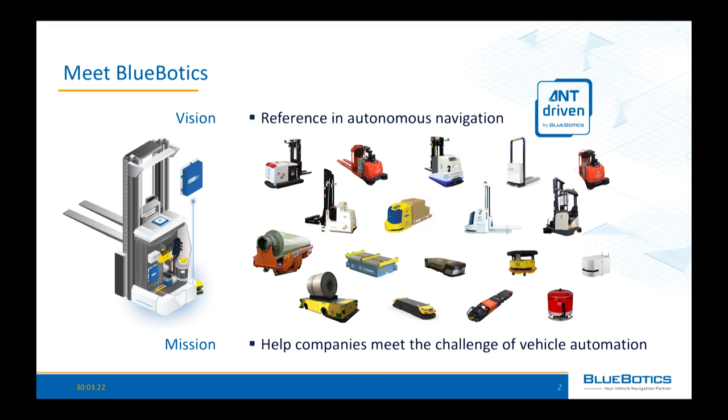Today I'll be talking about three projects that our customers have realized. Our company, BlueBotics, supplies a navigation system and fleet management to vehicle suppliers. Our vision is to be the reference in autonomous navigation, while our mission is to help companies go through the challenge of vehicle automation. Our company is 21 years old, and our customers have installed more than 3,000 vehicles around the world. We assess the systems to be more than 1,000, because we don't even know right now, our customers doing all the work. And we've calculated that the vehicles using our technology did more than 10 million kilometers.

Now let's dig into the topic of today. We have three examples of applications that have been implemented using our technology. Again, we are just the technology supplier. The work has been done by our customers, the vehicle suppliers, and the integrators.

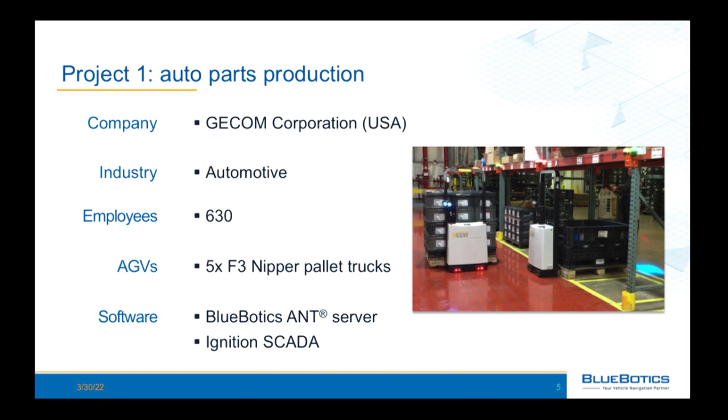We start with an application in auto parts production in the USA. The company is called GECOM Corporation. They are in the automotive industry, with 630 employees, and they've installed 5 AGVs from the company F3 Design in the Netherlands. The model is called Nipper. They've used our fleet management to integrate with their own warehouse management system, the Ignition SCADA system.

The challenge for them was to optimize the use of resources, especially headcount. They were analyzing their own plant and realizing there were some inefficiencies, and that's how they approached the project, in order to optimize efficiency and costs.

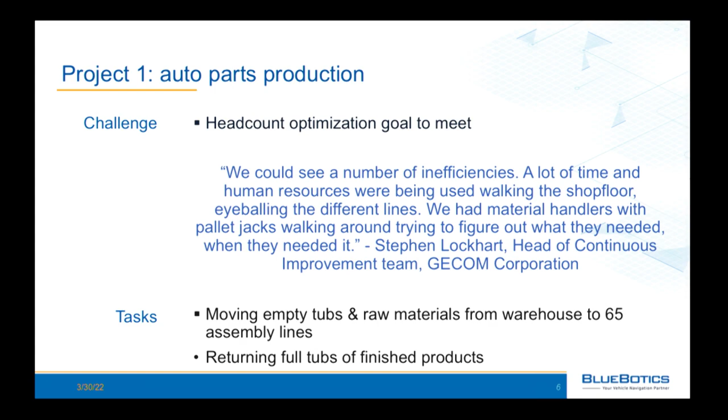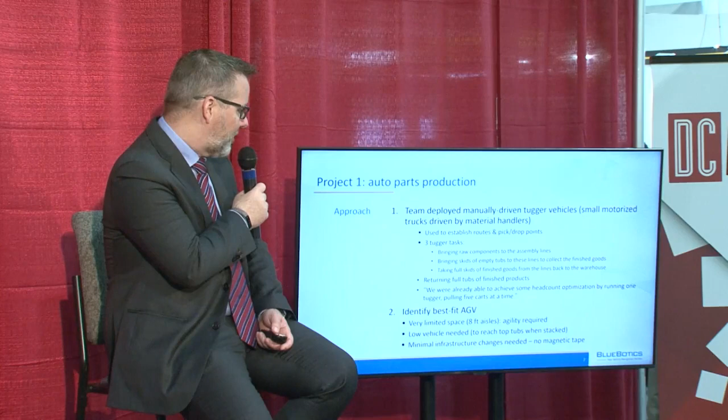Basically, they have to move parts around the warehouse, tubs and raw materials that go from the warehouse to the assembly. They were working before with manually driven vehicles, which was quite complicated because of a lot of movements, and they had quite slow delivery because of that. So they had to go through an analysis of the processes in order to find the best solution for them. And they had one big constraint, which is that the space they have is very limited. So that's why they had to find the right solution for automation in this plant.

The right solution turned out to be the F3 Design Nipper vehicle, which has a capacity of 1,000 kilograms, or about 2,200 in US metrics. It's a very compact vehicle, and as the person responsible for the project said, as soon as they saw this vehicle, they thought that's the one they need for their application.

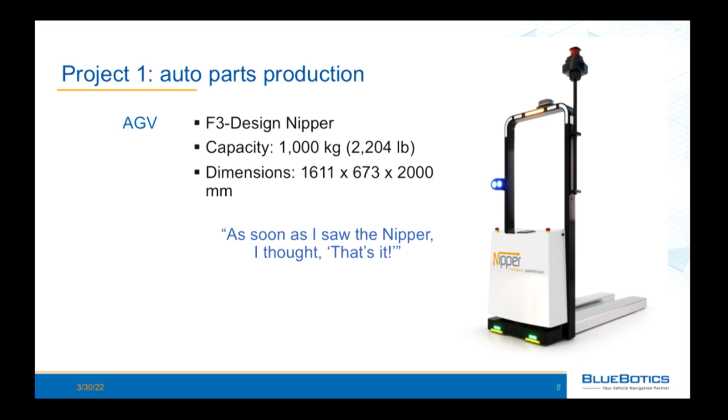In terms of software integration, they used the fleet management provided by us as a technology supplier in order to interface with their SCADA software, and they developed a dedicated interface for that.

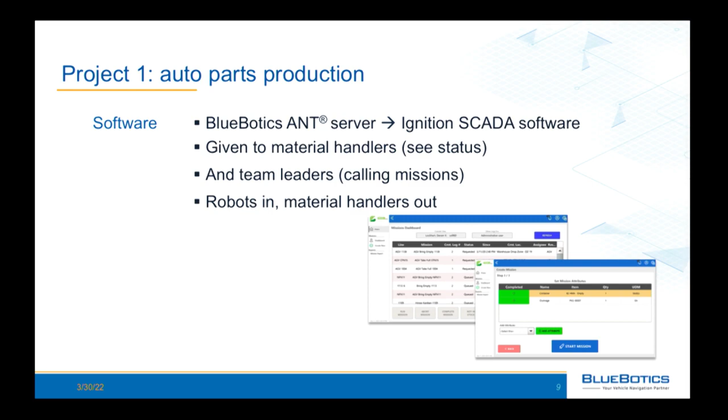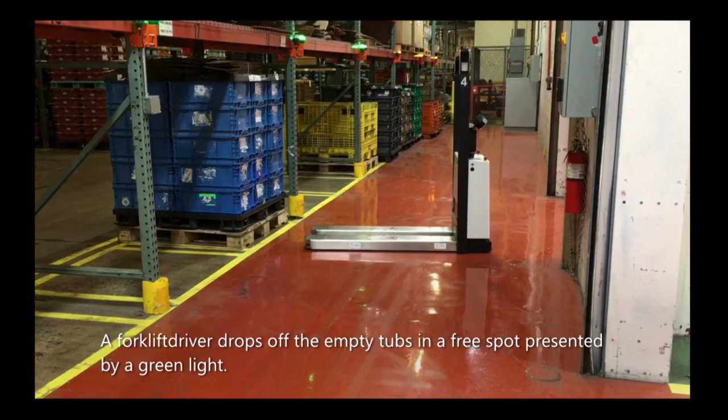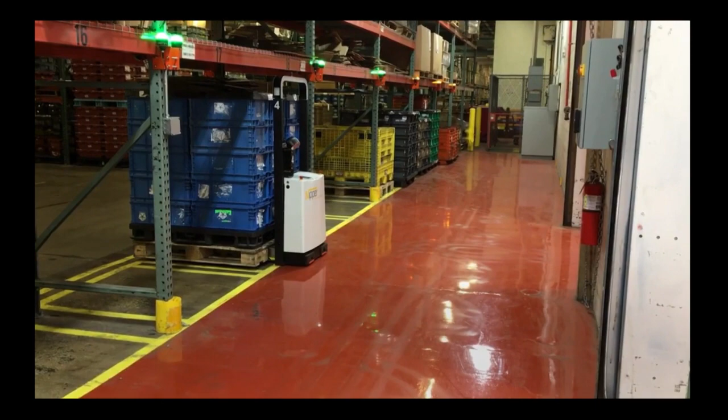This is a typical setup that they have. You see there is very limited space to move around. It would not be easy, even with a typical pallet jack, to pick up this kind of payload. This vehicle also has the speciality that it can move in an omnidirectional way, so it can correct sideways in order to pick up a pallet. They use a functionality we provide, a pallet search, so if a payload or pallet is placed manually and maybe not exactly where it should be, the system can search for it, find it, and pick it up.

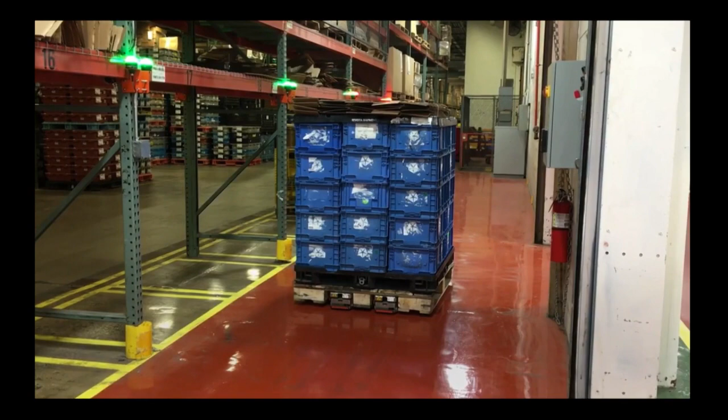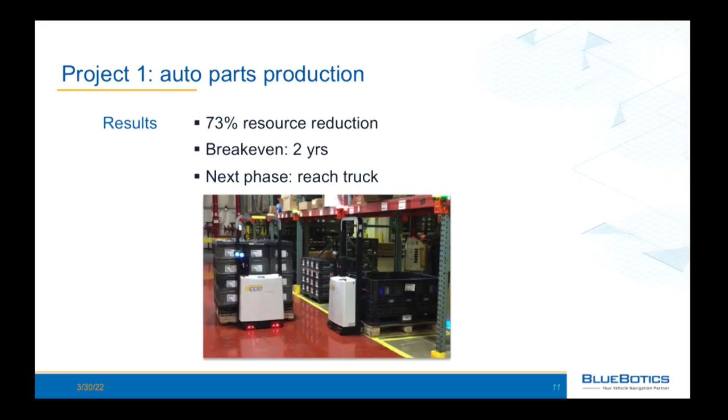I don't want to spend too much time on the videos, but the result is that they could reduce resources by 73% in this process, with a return on investment, or break even, after 2 years. In the next phase, they want to automate another process where they need a reach truck vehicle, and they are now discussing with different suppliers using our technology, to make sure they can put this new vehicle together with the others in the same fleet management system.

The second example I'd like to show you is a completely different setup: automation in semiconductors. One has to know that semiconductor production is probably one of the most, if not the most, complex production processes that exists in the world.

The customer there is ABB Semiconductors, which has recently changed to Hitachi Grids because it's been acquired by Hitachi. In this high-tech semiconductor industry, they use 14 small vehicles, and again, they were using the fleet management provided by us as a technology supplier, interfacing it with their own manufacturing execution system, called ABB Ability Manufacturing Operations.

The goal was to increase efficiency to remain competitive. This plant is in Switzerland, and labor in Switzerland is very expensive, so they had no choice but to either automate or stop production in Switzerland and go somewhere else. The goal is indeed efficiency, but much more concrete: if we want to keep production in Switzerland, they had to automate. This is the same happening in the US

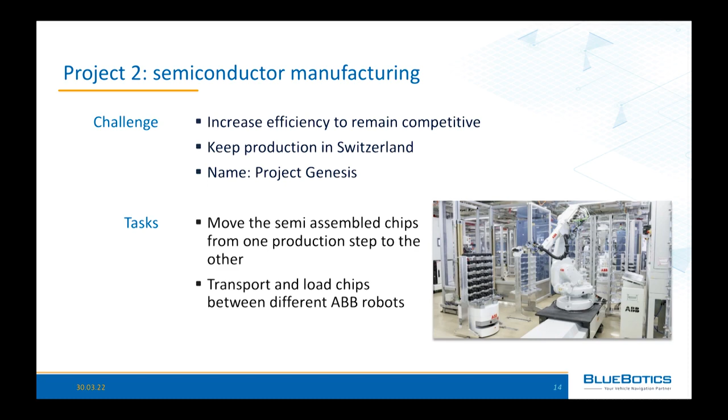and in most of the developed European countries. The task is to move semi-assemblies from one machine to the other to implement this very complex semiconductor production process.

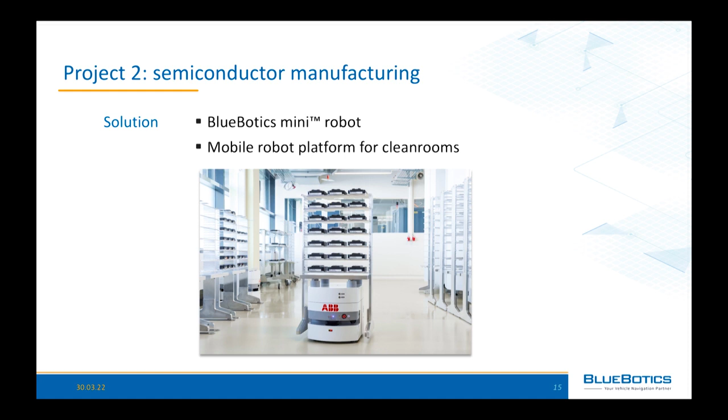In this case, it's an exception - we developed the vehicle ourselves because our customers were not able to do that. Now we collaborate with our customers for this kind of application. Another constraint was that the vehicle had to move in a clean room, ISO 5 environment, so there are also a lot of constraints in terms of clean room compatibility.

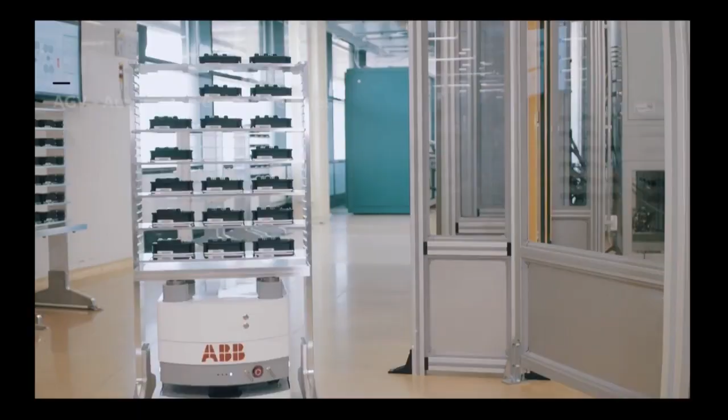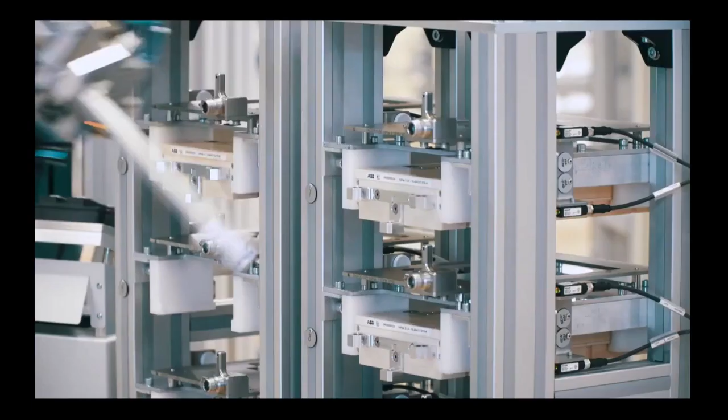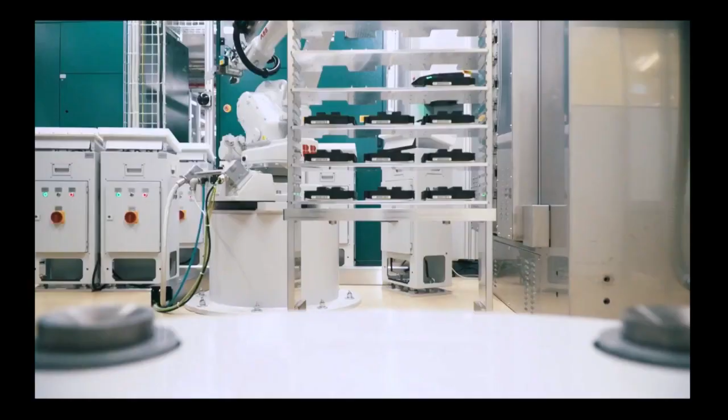As you can see here, the semi-assemblies are moved on carts on one side and on trays on the other. There are 3 different types of vehicles doing that, moving these parts between production machines, or in this case bringing them to the test facility system, which is completely fully automated. The main idea was to move from the 100-person manual semiconductor production to a fully automated one that can run 24/7.

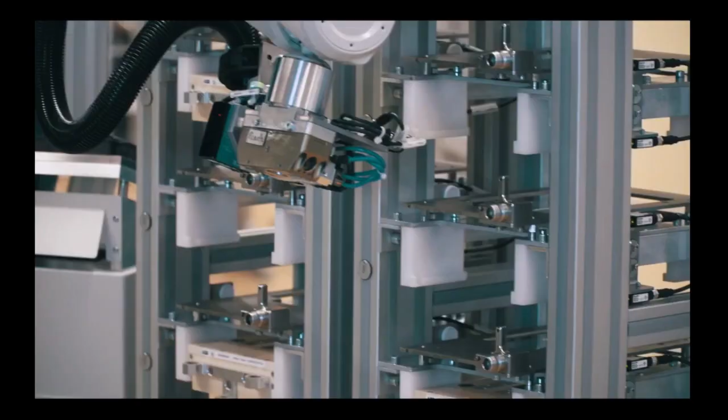The result is a significant productivity increase. I think the customer didn't want to disclose how much it is because it must be huge. They also have an improvement in quality - they won several awards, and the big point is that they could keep the production in Switzerland, meaning they reduced their headcount to stay in Switzerland, but they still keep 200-300 people around this facility to make everything happen, which would not be possible without automating.

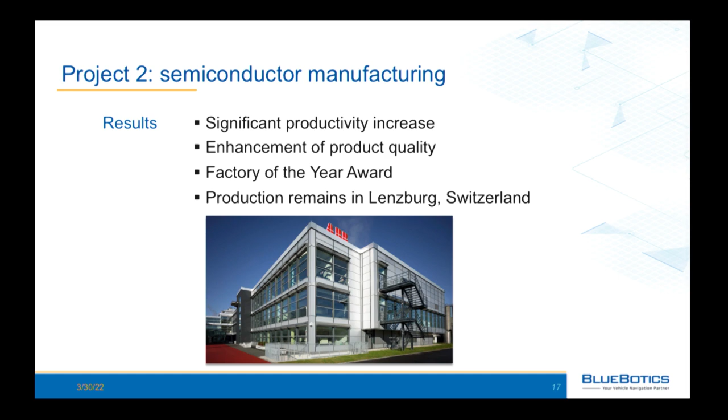The third example we have is again in a completely different topic. Again it is automotive like the first one, but now it's not about tier 1 component supply - it's about tire production. Tire production is a quite old industry, and it has not been automated as much as the automotive car production market, so there is a lot to do there to be competitive today.

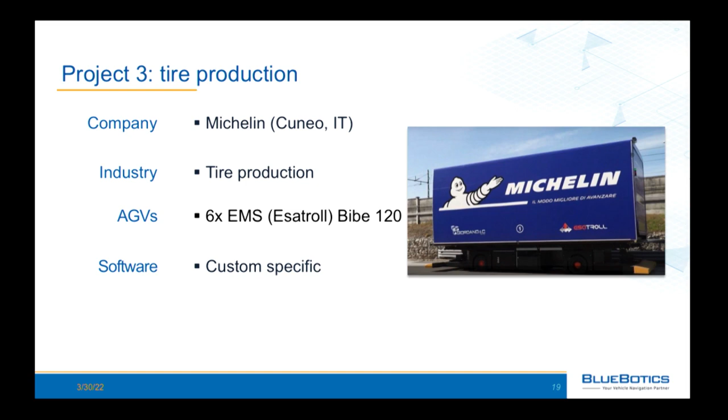In this case, we have a very specific challenge that had to be solved. The company is Michelin in Italy, in Cuneo. They produce tires, and they have installed 6 quite huge vehicles simply to move all the tires they produce from the production building to the building where they prepare them

to send via trucks to different customers around Europe. The goal there was to improve cost efficiency and safety, because in the past all the process was done by manual trucks, and the goal was to replace these existing manned trucks. The transport to be automated was to move all the tires from

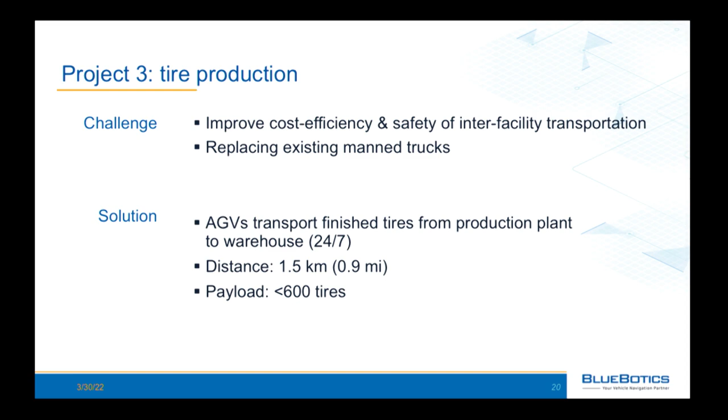production to the warehouse, and it's quite long - almost 1 mile distance outdoor where this vehicle has to work, and they are moving less than 600 tires every time. As you can see here, the plant is quite impressive - you see this huge street going through the plant that was used in the past by manual vehicles to move all these tires. I think they produce about 10,000 tires per day, and these have to be moved from one side to

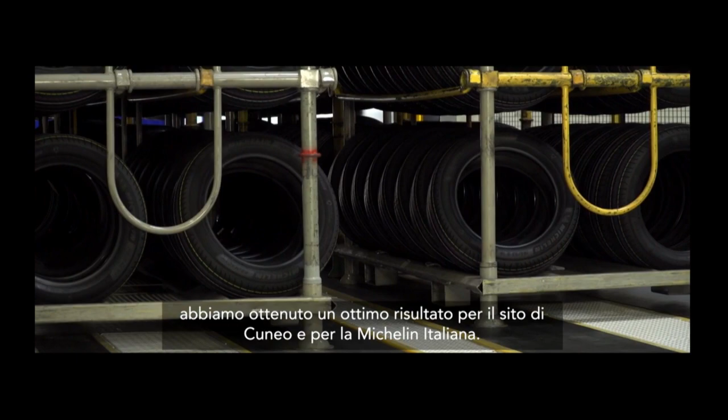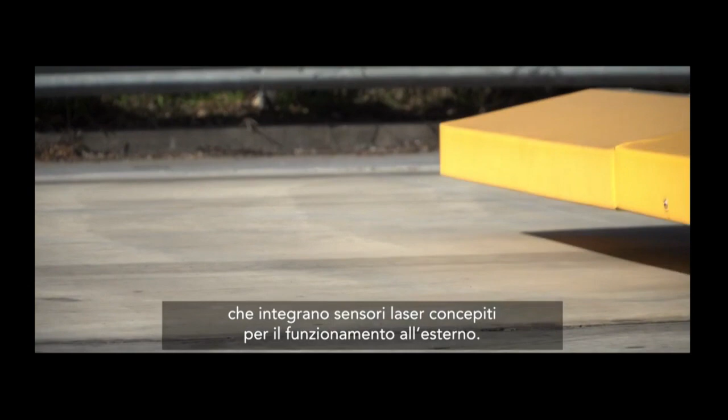the other of the plant by these huge machines. This is now a fully automated process running 24/7, in summer, in winter, every season. The result was very successful - there are not so many AGVs working outdoor like this, so it was indeed a kind of milestone in the field to put this kind of machine outdoor for this process. For the customer, the goal has been achieved: increased efficiency, cost reduction, better safety, and also a quite important ecological impact, because they reduced CO2 creation by 50 tons per year.

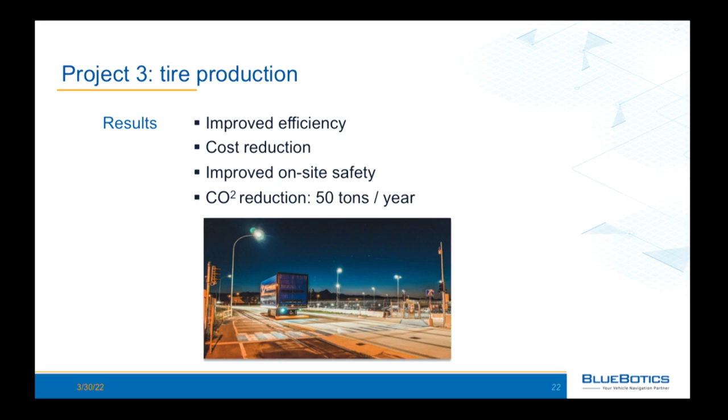These were the 3 different applications we wanted to show. As we said, BlueBotics is an independent generic component supplier that delivers navigation systems for any kind of vehicles and applications. So now I'm happy to take questions, as I'm finished with the presentation.